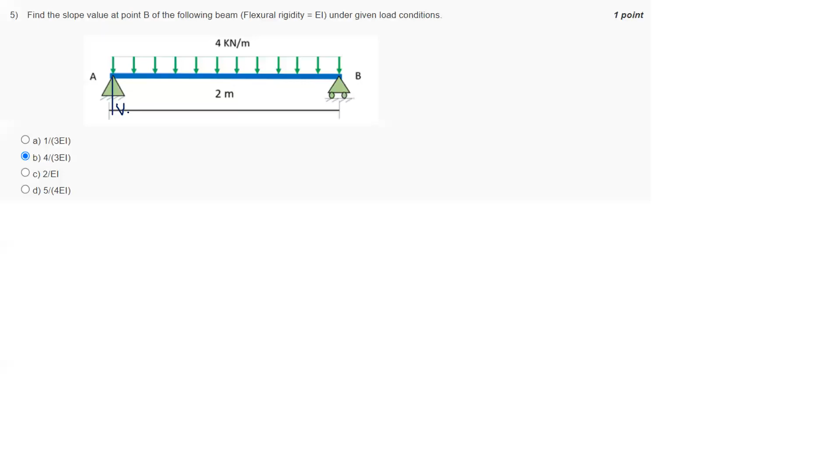So find the slope at point B. Now we know the slope we are going to get means we have the reaction at B. So whatever reaction at B we have, that will be the slope at B. Reaction at A, we have slope at A. So this will be the given beam. We have 4 kilonewton per meter. We have this distance 2 meter. So reactions we will get as 4 kilonewtons.

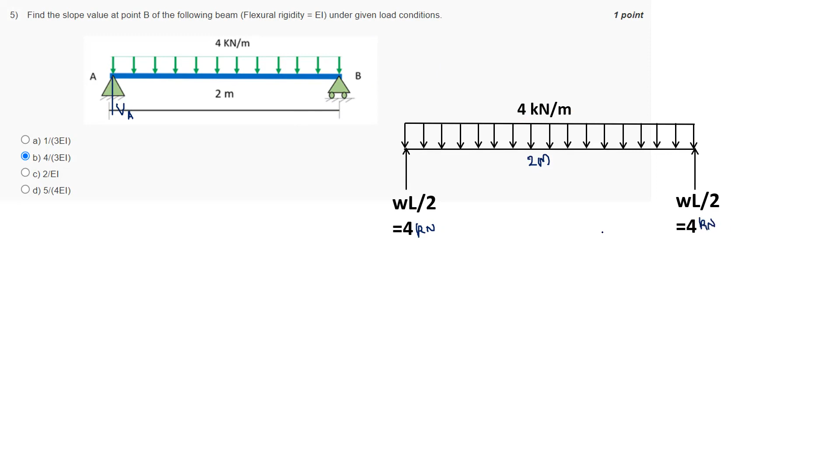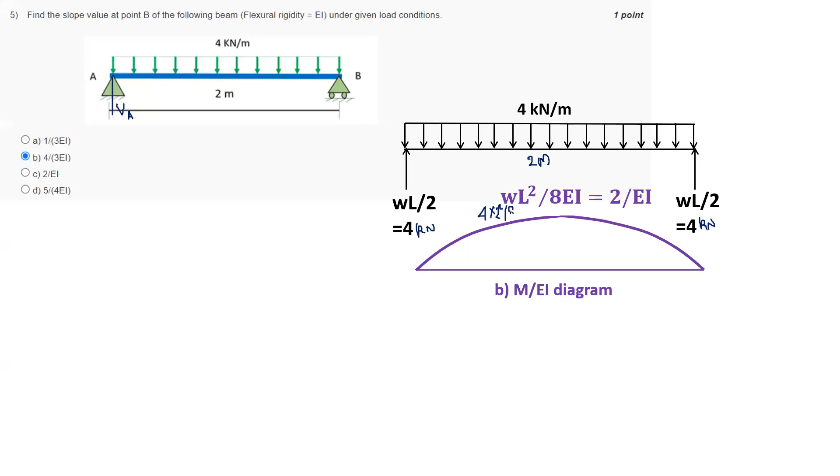Now reactions give slope for the conjugate beam, not the simple beam. So this will be the M by EI diagram. W value we have 4, L we have 2 square, upon 8. So we have 16 upon 8, that will be 2 upon EI. Now the conjugate beam, we have it with loading. We are interested to find VA and VB, more with the slope, so we are interested with the reaction at B.

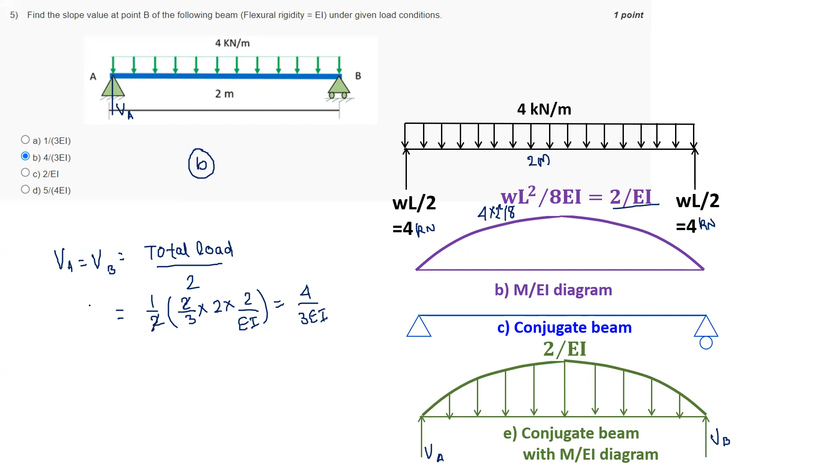So now we can have VA equal to VB equal to total load by 2. Now what is the total load? This is a parabola. So we have 1 by 2 into 2 by 3 into base, that is 2 meter, into 2 upon EI. This 2 gets cancelled and we have this value as 4 upon 3 EI. So 4 upon 3 EI, we have option B. So this will be theta B, which is 4 upon 3 EI.

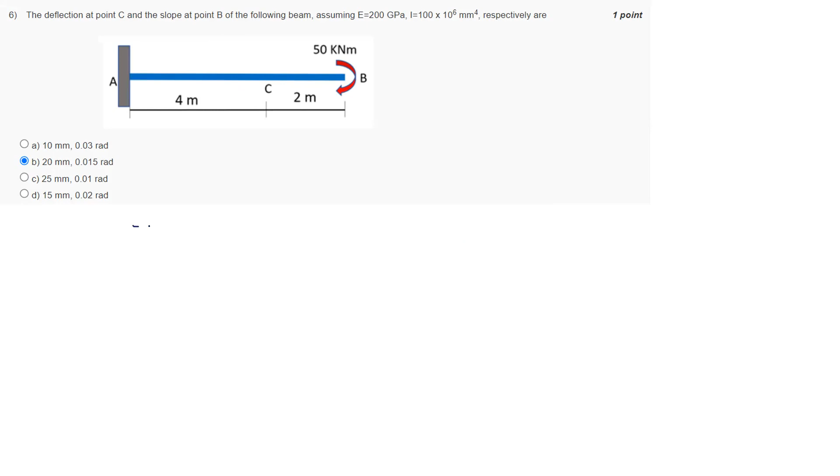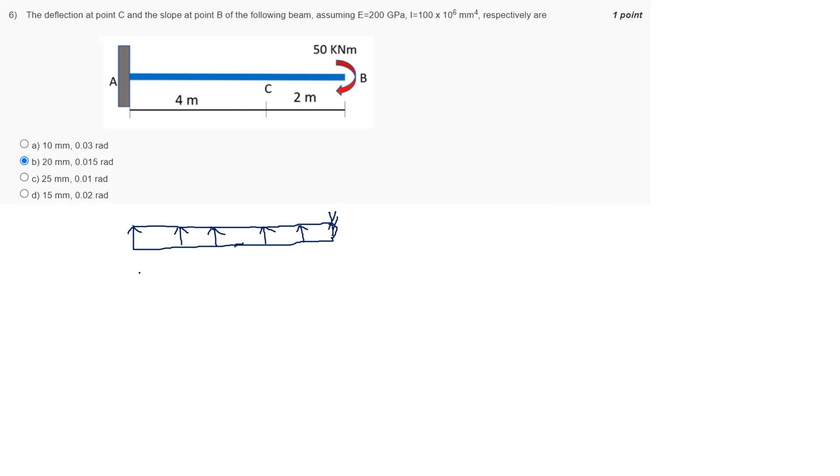Now if I draw the conjugate beam with the M by EI diagram, it is going to be in this fashion. We have this as clockwise, so it will act upward. The value we have is 50 kilonewton meter. So we have this M by EI diagram as 50 upon EI. EI is constant. We have to find the deflection at C.

This is 4 meter. So we have to consider only this portion and find the moment at C. How will we get the moment at C? We have this as a rectangle. So 50 upon EI into 4 into the centroid, which will be 2 meters. So into 2, and from this we get 400 upon EI. Now EI is given.

If I multiply EI, we have 200 GPa given, so 200 into 10 raised to 3 into 100 into 10 raised to 6. So this becomes 2 into 10 raised to 13, Newton millimeter square. Convert it into kilonewton meter square: 2 into 10 raised to 13 into 10 raised to minus 9. So it becomes 2 into 10 raised to 4, or 20 into 10 raised to 3 kilonewton meter square.

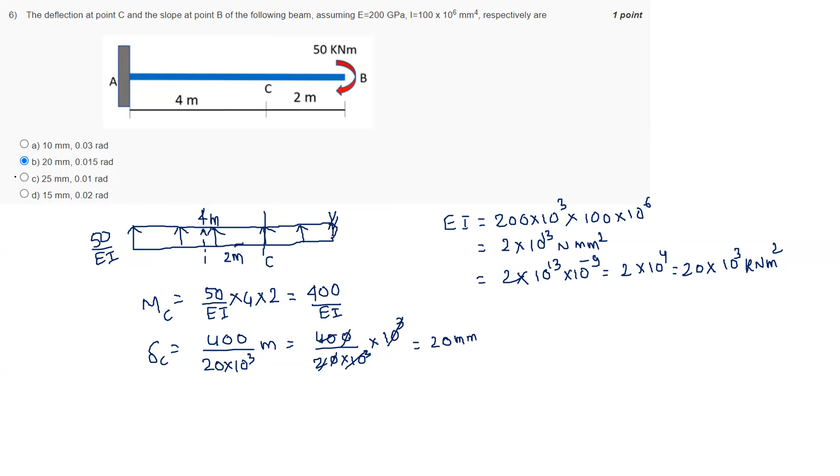Now we get MC as delta C, and delta C is 400 divided by 20 into 10 raised to 3. This value is in meter. To convert it into millimeters, we multiply by 10 raised to 3 again. This gets cancelled, and we have this value equal to 20 millimeters. We need not calculate theta B because we have only one option with 20.

But we can calculate theta B, that is equal to VB. VB will be the total area. What will be the total area? 50 upon EI into 6, so we have 300 upon EI. The value of EI is 20 into 10 raised to 3. So this is 50 into 6.

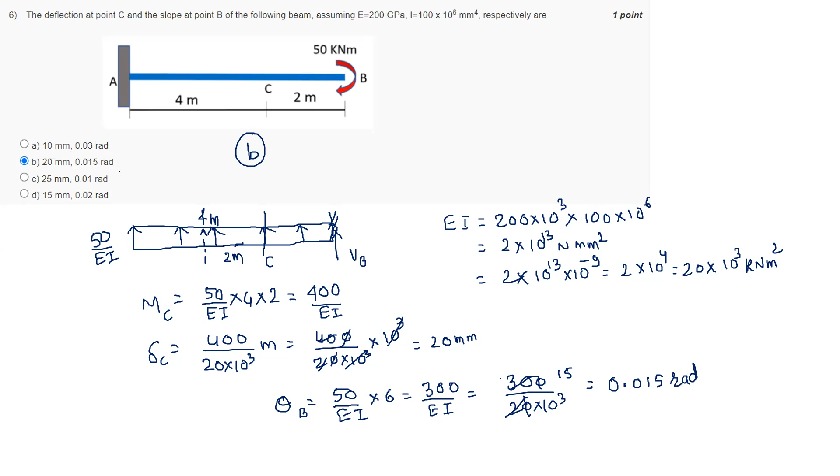Yes, 300 upon EI. Then we have 300 divided by 20 into 10 raised to 3, which gives 15 upon 10 raised to 3. So this will be 0.015 radians. So we got both answers: 20 millimeter and 0.015 radians. So this is the sixth problem.

Then we have the seventh. In this again we go with the conjugate beam. So B becomes fixed, and we are loading till this portion. The loading diagram will be in this fashion. What will be the total load? This will be 12 into 2, that is 24, acting at 1 meter. So this will be 24 kilonewton per meter.

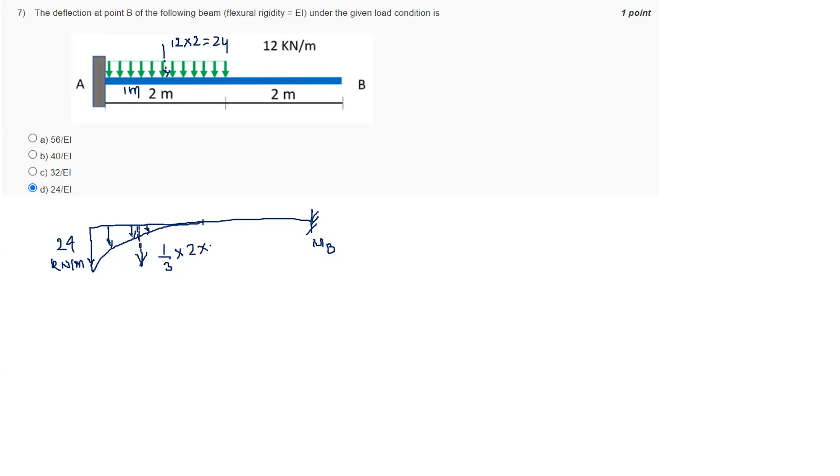Now we are interested to find deflection at B. So we have to find value of MB. So now total load of this, that is actually in upward direction. So total load we will get, that will be equal to 1/3 of base, we have 2 into 24. So it becomes 16 upon EI. So this is 24 upon EI.

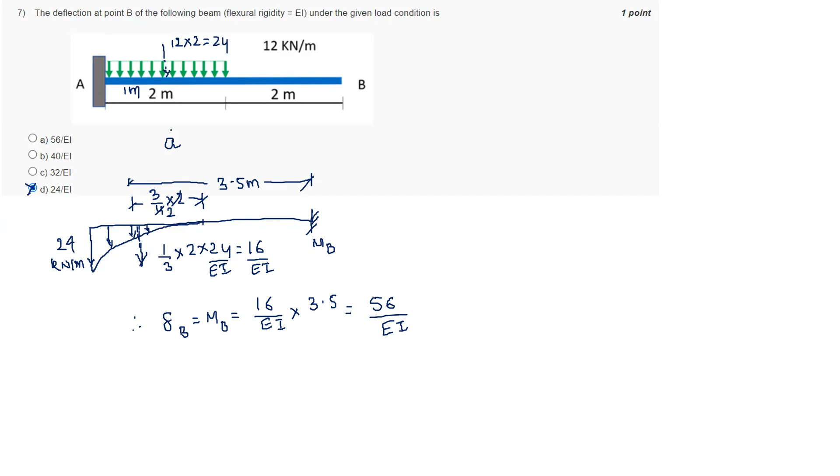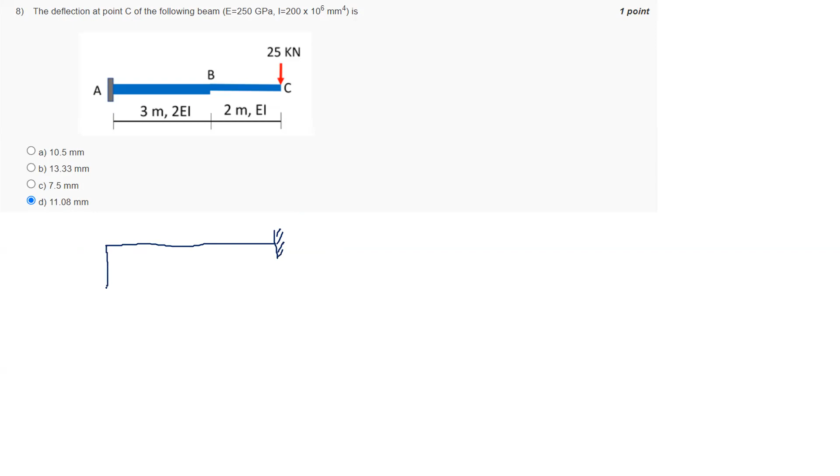So 56 upon EI. So we have option A, 56 upon EI. And then we will go with the last one. So now again we are in the same fashion. We will draw conjugate beam, and then if we draw bending moment diagram, we have 25 into 5, so we have 125. This is M diagram.

So if the bending moment diagram is downward, you have to show an arrow upward in conjugate beam. Now we have 2 EI till B. So value at B we have 50. So in this portion we have to divide by 2 EI, and in this portion we have to divide by EI. So conjugate beam with M by EI diagram, how will we get this? We will divide this 125 by 2, so it becomes 62.5. Now this 50 we will divide by 2, so it becomes 25.

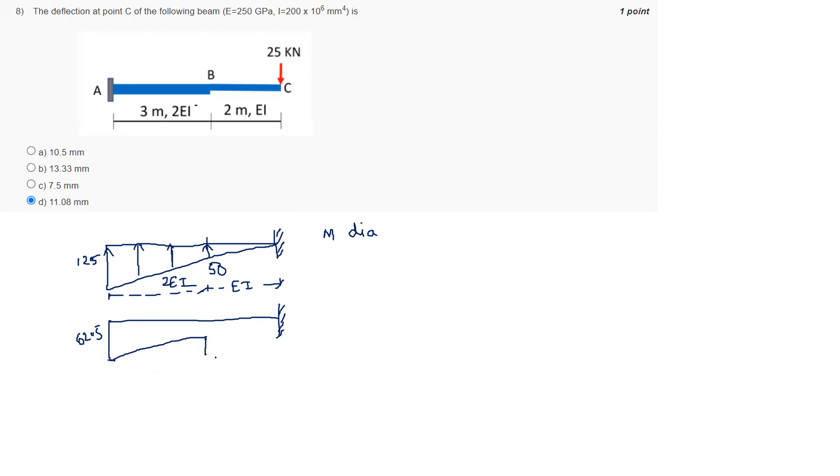And then again for second portion, that is for BC, it is 50. Here we have 25 and then 0. So we are dealing with 3 parts. So if I take this large portion, I will consider 2 portions of this. This will be first portion 25 upon EI, and this will be remaining portion which will be 37.5 upon EI.

Now first for this, total load I will consider 25 into 3 upon EI. So this value is equal to 75 upon EI. And distance from B will be 1.5 meter. Now second we have this portion: 1/2, base 3, into 37.5. If we calculate this value, we have 37.5 into 1.5, so it comes 56.25. Now the distance will be 2/3 of 3, so this becomes 2 meters from here.

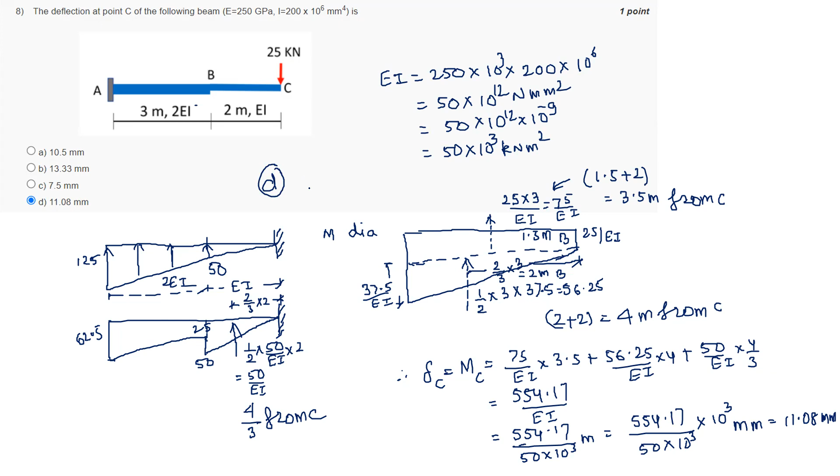So the remaining two we will see tomorrow. So you have to divide this into 3 parts and then you will get the answer for it.